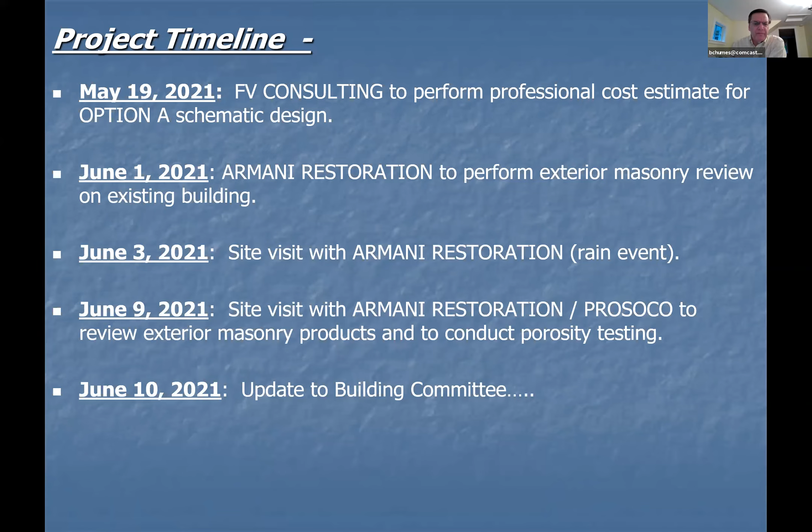Well, I want to update you as to what's happened since. On June 21st, the professional cost estimate was forwarded to the town of New Canaan. Also on June 21st, we forwarded the Armani Restoration and Prosoco Masonry results to the town. And on July 1st, I also provided a square footage comparison chart to New Canaan.

This is something that came out of your June 10th meeting: what's the square footage and how does it compare with the needs assessment? So I wanted to complete that, and I completed that on July 1st. Which brings us up to today. So those are really the three things I want to touch on today.

I'll do the masonry restoration first. Can I interrupt for one second? Can we just have everyone mute? There's some side interference. Thanks, Joe.

Armani Restoration is a contractor that specializes in masonry construction and masonry restoration. We contacted them to come down to take a look at the building, give us their professional opinion on the condition of masonry and limestone and anything that needs to be done on the exterior of the building. And they did that. What they found was the exterior of the building is in good condition.

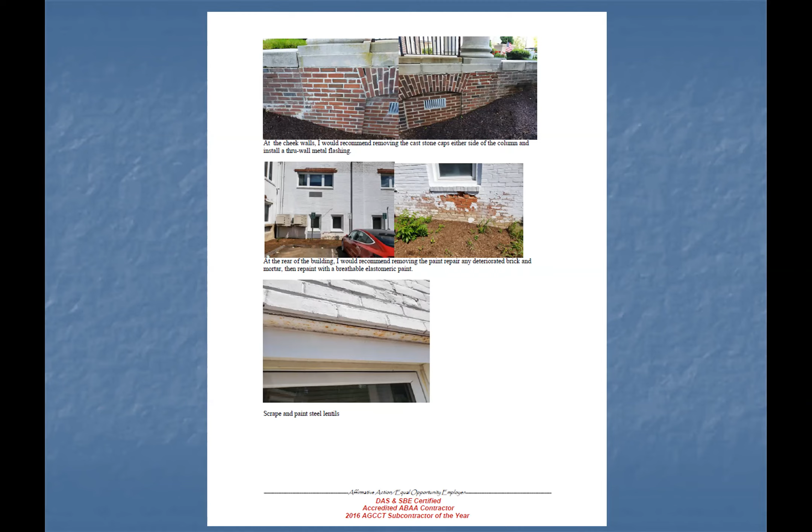How often would it have to be repainted? Those are going to have a lifespan of 10 plus years. So every 10 years it needs to be repainted, probably.

He also found some penetrations through the wall that weren't sealed - any penetration is just an opportunity for water to get into the wall. These are kind of minor looking at the entire exterior of the building. I saw these as pretty minor items we would take care of if we were going to renovate the building. It should be noted the painting issue is only on the back of the building - the ends, sides, and front, I believe, are pure brick and have never been painted.

Another interesting test they did is called the Rilem tube test. It tests porosity of the masonry using water. They put a device up against the masonry - this is a tube - they seal it to the masonry and fill it with 5 milliliters of water, representing wind-driven rain. Filling it all the way up to the 5 milliliter line represents about a 98 mile per hour wind event, with pressure applied to the masonry.

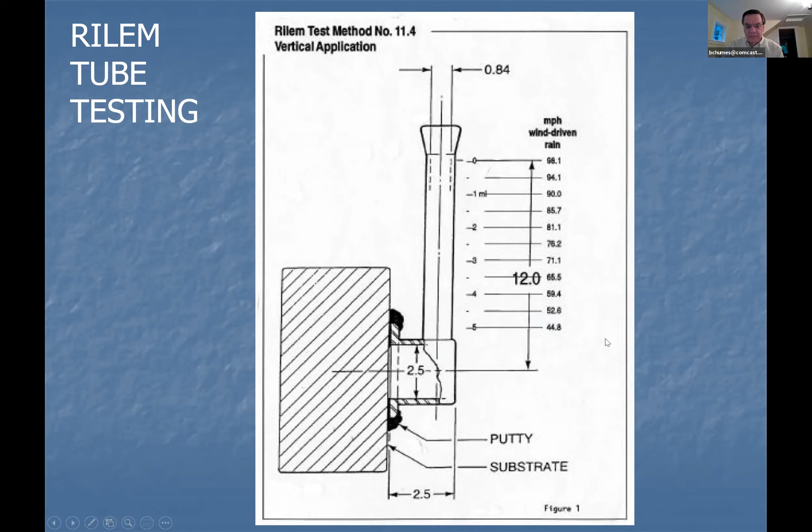So it's testing the water absorption of the brick under a wind-driven rain event - you can see the miles per hour of the rain event. Most rain falls vertically, but in some events rain comes sideways against the masonry, and that's when water has the opportunity to enter it. The tube was filled with 5 milliliters of water, and it failed in 10 seconds, meaning all 5 milliliters went into the masonry and was absorbed in 10 seconds.

A successful test would have no more than 1 milliliter of water absorbed in 20 minutes. So 1 milliliter in 20 minutes versus 5 milliliters in 10 seconds means the masonry used there is very porous. If you have a wind-driven rain event, that water is going to enter the masonry and be absorbed.

Now, this is something that's so not... Brian, what you're telling me is that the masonry here is as porous as the offensive line of the New York Jets? Is that what you're saying? Yeah, on a bad day.

And what you're also suggesting is that tomorrow morning, with 45 to 55 mile an hour heavy rains, we're going to experience the 10-second failure. Yeah, anything that goes against the building is going to get absorbed.

Hey Brian, is it the brick that's absorbing or is it the mortar? Actually, they tested both. The first one was the red clay brick. They tested it there, and the results failed in 10 seconds. And then the head joints and the mortar joints were tested, and they also failed in 10 seconds. So we have two results here - one's for mortar and one's for the brick. That's a good question, and they were both tested.

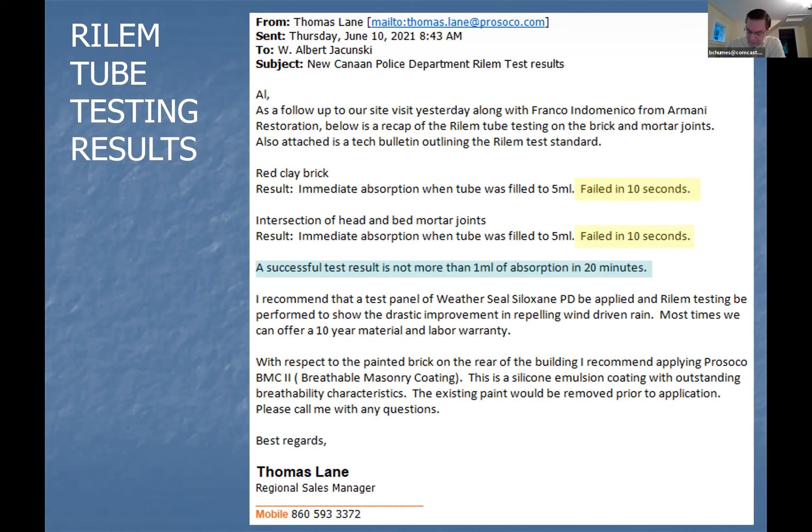And this is the product that would be applied. You could apply it to a test location and test it after it's been applied. But this is something that would also be under a 10 to 15 year reapply, like the back paint - you would want to reapply this and reduce the water absorption within your building.

Hey Brian, a couple questions. Is this product been around a long time? Is this kind of how, in general, people treat porous brick? The reason I ask is because we talked about the paint on the backside of the building - obviously the wrong paint was put up, but at the time they didn't think it was the wrong paint. Could this be one of these things that seems like a great idea, and then shoot, maybe it's not? I hear what you're talking about with the freeze-thaw cycle, and especially with changing climate, that might be more of a struggle for these brick buildings. But how long has it been around? Is it environmentally friendly? Could we find out this was a great idea, and then five years from now go, oh shoot, we've got to take this all off?

So I think Prosoco is a reputable company. They've been doing a lot of testing on these products. There have been other products in the past, but one of the things that's been a challenge for a lot of these companies is providing products that work and are also environmentally friendly. And that's changed the chemistry on some of these products.

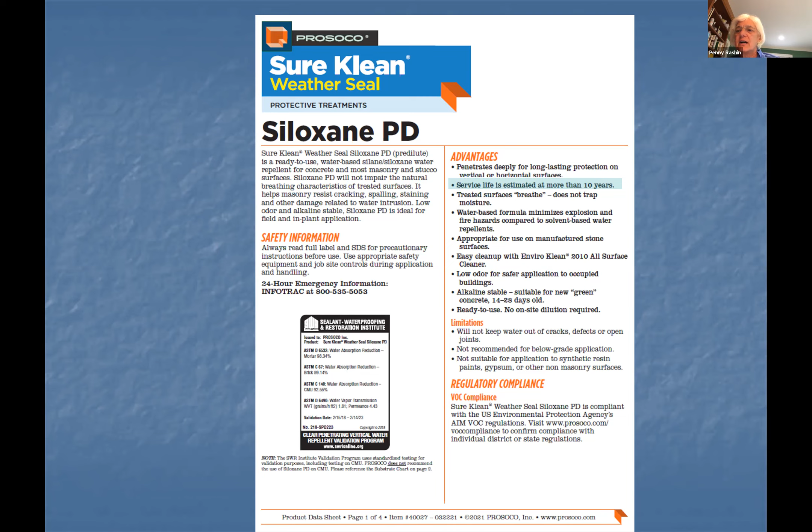Okay, so I think this is incredibly helpful, and I'm a little bit like Amy. It sounds to me like if it's the same brick that's been there for all those years, maybe we'd want to put this sealant on. But if we decide to go forward with the renovation, I think that would be another step where I'd want to know a little bit more about it before just agreeing to do it. This is a great report that our brick is in great shape. I'd be curious what the porosity was, and even if they tested it on the town hall before they did the town hall renovation.

Joe, I don't know if you know that or not—not to put you on the spot. No, we tested it. We added some through-wall flashing and did some other measures, and we repointed the town hall, which this one doesn't need.

And Joe, would it have failed as this one would with 10-second failures? It was not as porous as this, no. From a condition perspective, the town hall brick was in better condition than the police department building brick. I wouldn't say better condition—it was less porous.

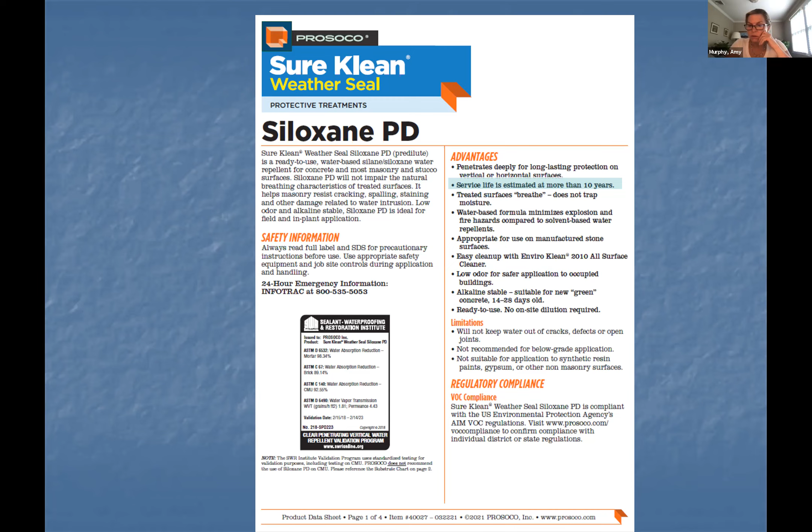It required a full masonry report, through-wall flashing—there was a lot of masonry work at the town hall. So is it basically a different brick? The actual brick is different. So I think it was well worth the visit that they took and the investigation.

Prosoco also gave a recommendation for the type of paint to put on the rear of the building, so that was also included in Frank's estimate. It was recommended that I just review quickly the scope of work that I sent to Frank to put within his cost estimate. You've seen these before—these are not new, but if there's anybody new on the call or on the committee, I just want to briefly run through what Frank has in his estimate.

For site work, he's included an independent cost to build the carport and an independent cost to construct the pistol range. He has an independent cost for putting the physical training addition onto the rear of the building. The site work cost he's carrying is for completely milling and repaving the fleet and staff areas to the rear, including the ambulance spaces, the drives down, the public parking in the front, adding some access control gates to the rear parking area, and also redoing the parking area between the South Avenue Cottage and the pistol range. We're not including anything for the apartment parking, so that's the delineation of where the site work starts and stops.

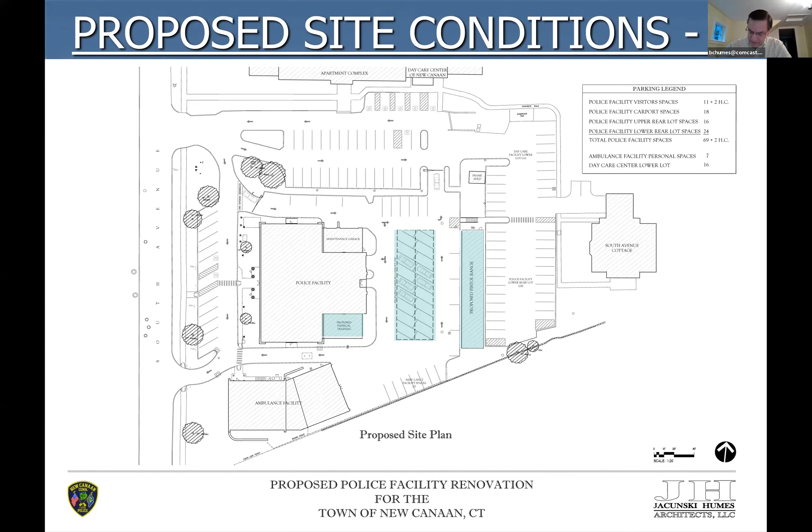This includes some relocations of the PD functions, but the relocation costs are not within the estimate. Those would be a soft cost to the town for any fit out that has to happen at Irwin Park, or anything that has to be moved over.

Frank's estimate deals with what the general contractor would be responsible for: staffing the project, general conditions of the project, and then completing the construction that's shown.

The cost estimate does not have within it any public accommodations. If the public would need to find an additional answering point for public safety during phase 2, we don't have that within the estimate, but something would have to be done to accommodate the public during that phase because the lobby would be off limits to public access.

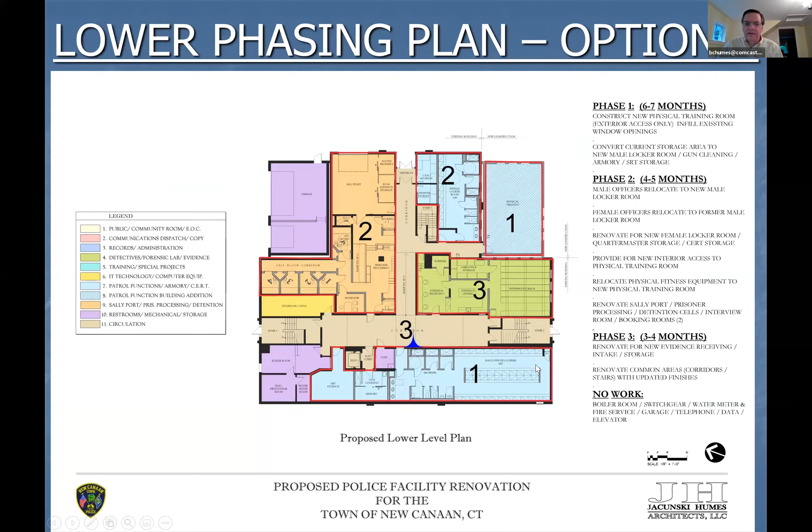You can compare the public space allocation in 2021 at 1143. Public means all of the yellow space that you see is public. So it's the emergency operations, public interview, restroom, lobby, vestibule, training classroom, even the permitting and interview rooms are all included in a public number. It's not an individual space, it's all of the areas in yellow regarded public. That's how I come up with 1143, but that's also consistent with my space needs assessment.

But you refer to that as actual square footage, when in fact is that not proposed square footage? I would agree with that, Stuart. It's actual from the actual schematic plan. Oh okay, but it's all being proposed right now. So actual and proposed, you could use them interchangeably, but it's what's on the drawing. Gotcha, actual from your proposed plan. Gotcha, okay.

So you can come down and see that there are slight variations in some. There are some deviations, administration is higher, Detective Bureau is higher, forensics lab is higher. You get slight deviations down the list.

How come the Sally Port's so much smaller? Because in the space needs assessment, we were anticipating a 2-bay Sally Port. And in the schematic design, we only were able to accommodate 1 bay. And Leon, does that work for you? I mean, that works?

Is Leon on? Sorry, what was your question? One bay Sally Port, well-designed, is that fine for you? No, obviously if it's a renovate as new, we're limited. So no, one is not ideal, two would be ideal. Well, what do you have now? You have one, right? Yeah, we have one. If, I mean, sure, it's like you always want the 3-bay garage, but it works for you? Okay, especially a redesigned one? It'll be better, right, than what we have now.

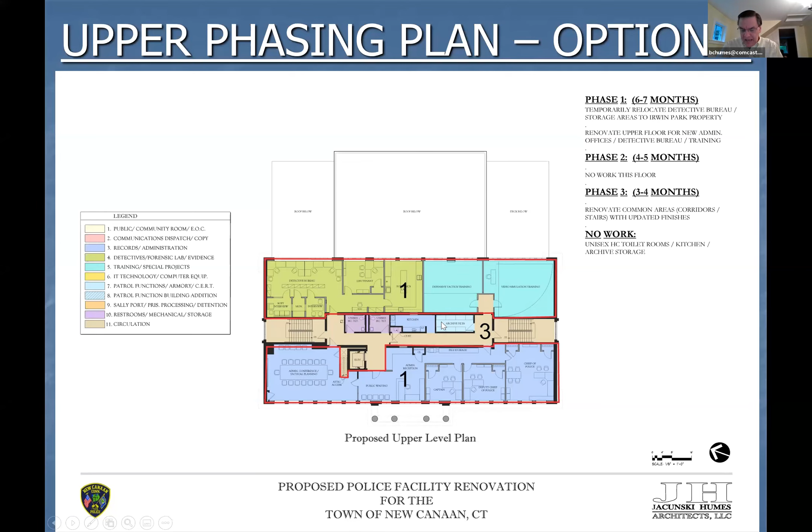The area of records is the area that's in blue with the 2 on it. That's their existing records, so that's where they have, and nothing was looking to change in that location as far as size. They do come over into this area for copy room, and so this is a common copy area that they also utilize. And where I was taking off the square footage for retention was on the 3rd floor. This archive files would be an area for retention of files beyond what they have within their record space. So they are retaining files within this space, but I also gave them an archive space.

To kind of add to that, in our tour of North Haven, they identified a serious deficiency with record storage. I think there's three areas of storage that we're kind of deficient right now in: property evidence, records, and vehicle storage. So those are kind of three focus areas, and I think we need to refocus on our needs related to those three areas and see what other considerations we can make. Because the reality is, as much paperwork as is digital, we still have a tremendous requirement to keep a lot of paper records, and that's not going to decline from what I understand. So that just needs to be an ongoing consideration. Right now we have a room where we're storing records, and we had some mold growth and had to remediate that and things like that. So that's just something we should certainly take a closer look at.

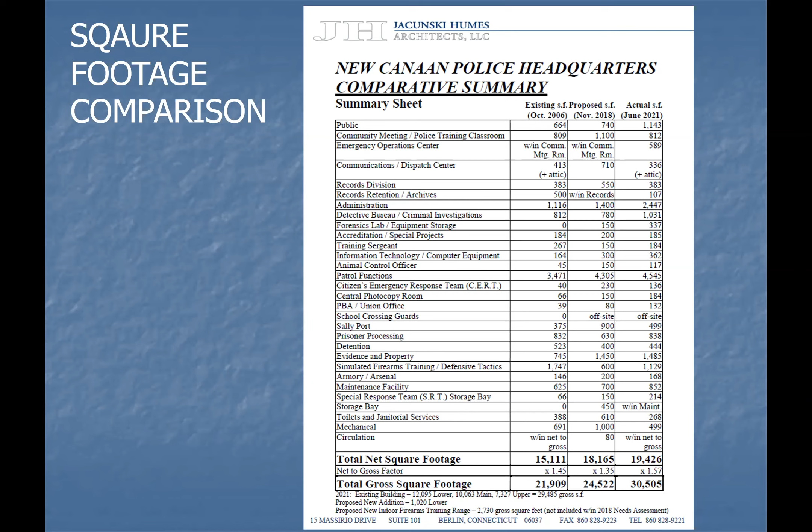It seems like if you had to grab more space, you could probably grab it from administration. I mean, if you're going up 1,000 square feet, and I'm sure the space would be nice, but it seems like if you have to steal some, I don't know, it could be a separate room or whatever, but it seems like there's more space there.

Because in this plan, which is kind of cool, we're giving the PD all three floors. Before we had talked about trying to carve out the 3rd floor for something else, which we know is incredibly problematic, and trying to have something co-locate with the police department. So I think it's a good idea to use the space for the PD, but it seems like there's space there we could redeploy if needed.

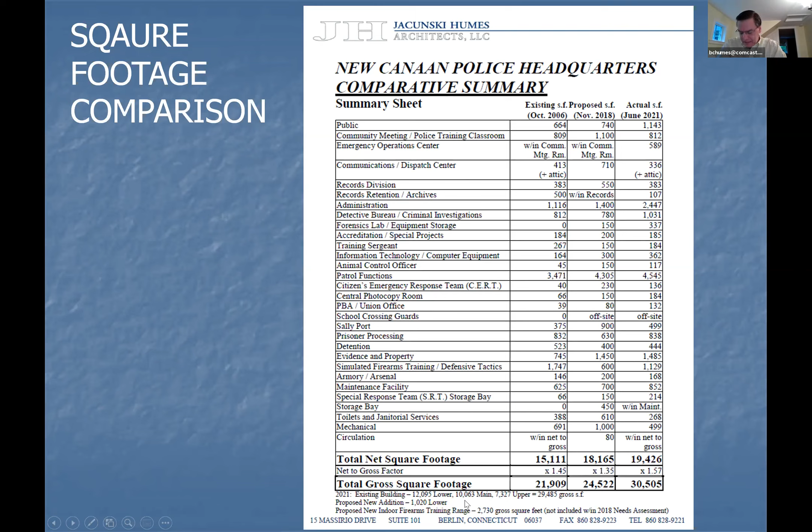So as I say, it's data. I think it's good data for you to have. I'm glad I put the chart together, and at the bottom of the sheet you can see square footages of each floor and how we came up with the gross, and then we added the physical training addition.

And that's just raw data. You're worried about the storm. Somebody else has to mute.

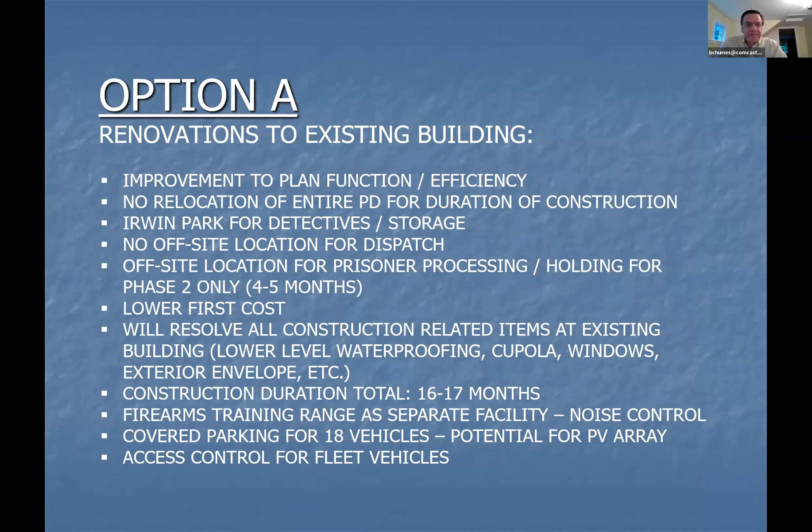So option A, this is the same slide you saw in June. It's what we sent to Frank for his cost estimate requirements, how we were going to make improvements to the plan. But what is actually this renovate as new? We've used the term back and forth, but what does it really mean?

The term is used in Connecticut for school construction. The Department of Administrative Services uses this term for school cost reimbursement programs. And what it means, taking their definition, because it's pretty common throughout the state, and it originates in the school renovation programs, is that the project results in a renovated facility taking on a useful life comparable to that of a new facility, and which will cost less than building a new facility.

So we're going to make it comparable to a new facility. I think if you looked at North Haven, that's what we did there. It's comparable to a new facility, but it costs less than a new facility. If you're going to go to school reimbursement, you have to prove that it costs less than building a new facility. This is done with cost estimates and professional cost estimators, showing the state that the renovate as new does bring cost savings versus just tearing it down and building it completely new.

The entire facility will be brought into 100% compliance with all applicable codes and accessibility requirements. That's a given. We need to make this building 100% code compliant to anything that's codes and standards, including what they have out there for police facilities called essential facilities. These have to be buildings that last through natural disasters, with higher wind load criteria and seismic criteria than any other facility in town. They have this essential facility requirement for hospitals, fire stations, police stations - any structure within your municipality that you'd want to have survive through a natural disaster. So that's a code requirement for this project, and we would have to bring it 100% into compliance.

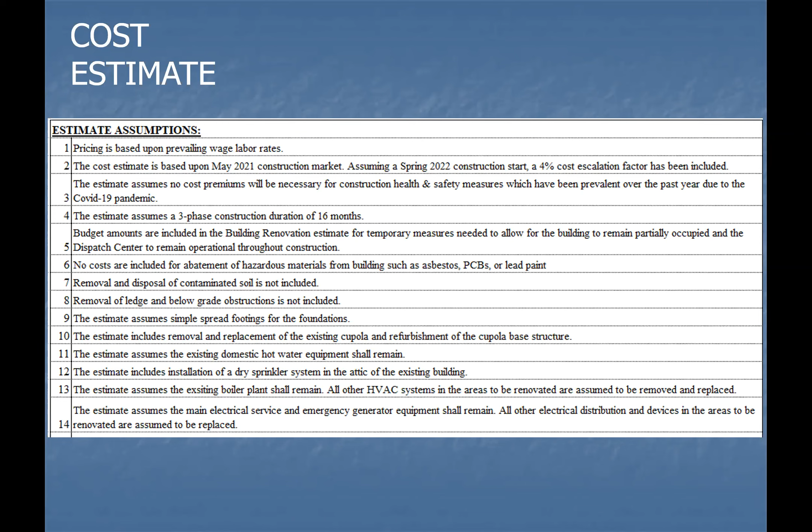Gotcha. Okay. Yeah, I think we just want to be sensitive and smart in maximizing useful life of stuff. But we also want to be smart and not have somebody come in 10 years or 5 years from now and have it be way more expensive to upgrade a system we could have dealt with initially. But those are fine tuning.

Yeah, and we can look at that further. It may make sense to replace the one older boiler with a condensing boiler. It's more efficient. So that's something that you guys can decide as a committee.

And we've assumed right now there's no sprinkler system in the attic, that I could see from any of the photographs that was forwarded to me from Brian. So in addition to redoing all the sprinkler systems throughout the building that do exist, we've assumed putting in a new dry sprinkler system in the attic of the existing building.

But I see a spelling error on my 13 - I had just mentioned the existing boiler plant.

I apologize for that. And lastly, the main electric service and the emergency generator equipment that exists, we've assumed will remain, but everything from the main electric room throughout the rest of the building will be replaced. And a complete new fire alarm system would be assumed for the entire building as well.

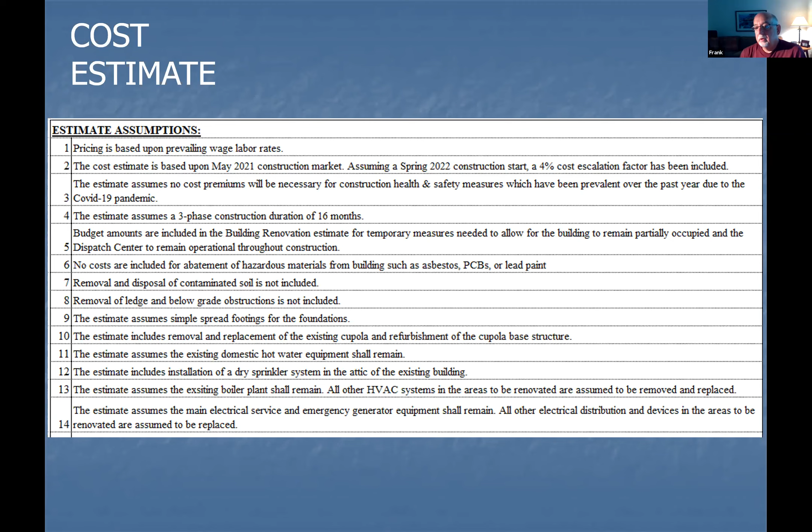For instance, the elevator. I've assumed no new work on the elevator. That would mean that the electrical provisions for the elevator system would remain in place, and would not be replaced.

When was the elevator installed? How old is the elevator? I don't know, that was a 2008 renovation. And what's the useful life of an elevator typically? A long time, life of the building. Yeah, okay.

Well, we wouldn't say the life of a building, but I'd say, Brian, I would use something like 30 years or so, 30 to 40 years. I see buildings with elevator refurbishments happening after a 30 or 40-year life cycle.

When we put the elevator cab in, it does have all the accessibility requirements that come with elevators today. So the control panel does have newer technology and accessibility requirements. In 2008, the shaft was already there - we added the equipment to an existing shaft.

So we don't, and this is again fine tuning, have any consideration of solar or anything like this. And the roof's okay, right? The roof's fine. Have we looked into that? Because I know we're doing a lot of solar across many of the town buildings.

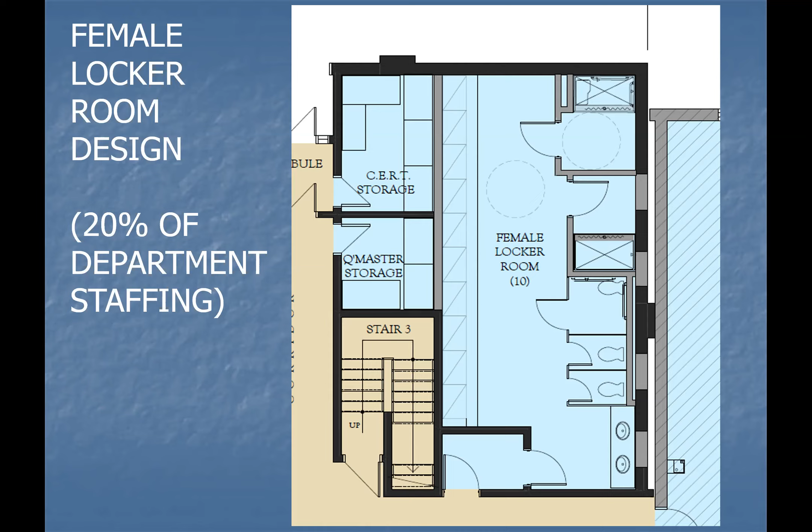Definitely it'll be more than a year. Okay. But we'll give you a better answer on that, Chief, but thank you for doing that. Of course.

Bill, just a couple quick slides. I don't want to belabor this, but it came up at the last meeting that we had in June. And I just wanted to respond that there was a discussion about how many female lockers should be in the locker room. And we talked about how we based it off of 20% department staffing levels.

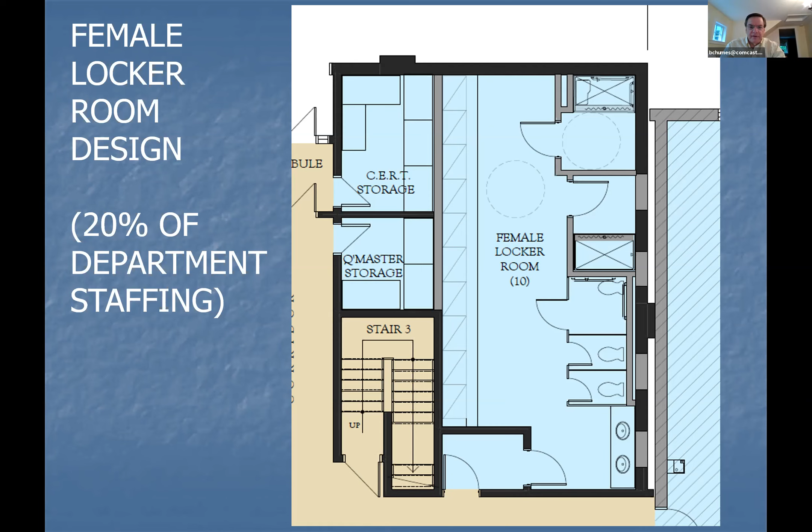I just wanted to let you know that the plan isn't locked in stone. I mean, there are things during design that we can continue to address. Or in porcelain, as the case may be. So I just give this back to the committee as information.

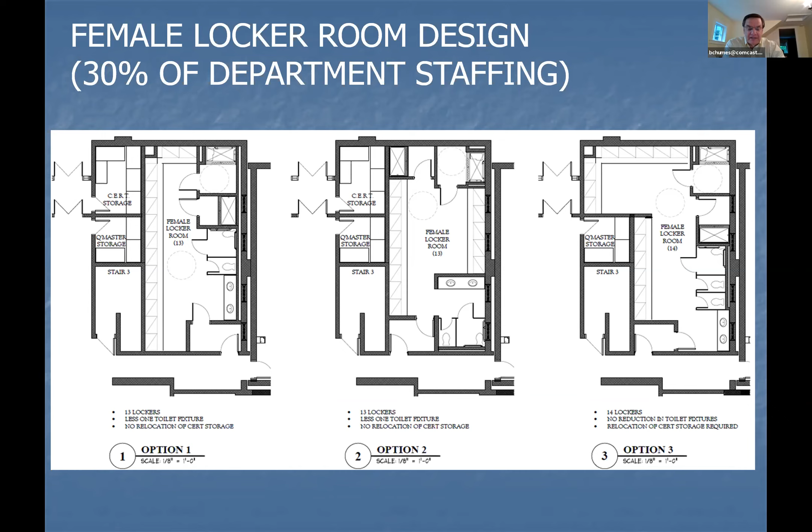But you said next steps. As far as our scope, the next steps was, I think we've completed what we've been asked to do. We were going to put everything into a final report, but now we'll just add the option B results that you're looking for also. So that's it for me here. Thank you. Any final questions for Frank or Brian? Oh, very good. Thanks. Thank you so much, guys.

Any other elements we want to talk about? The only thing that jumped out at me, I'll just reiterate on the cost, the landscaping. I gotta believe that if we do move forward with a refurbishment, our neighbors would request that it be the right thing to do to have some more serious landscaping as a potential shield and things like that. That would be incremental costs as well, not included initially with the initial estimates, but that's something to keep in the back of your mind.

Are there any other comments we want to make? Let me just ask you guys, I'm happy to update the estimate to reflect a more ample budget for landscaping, as well as to factor in the premium cost for acoustical panels to mitigate the pistol range equipment, and reissue that to Brian so he can put that in his final report with those costs in it. I'd certainly be in favor of that, Frank. Yeah, that'd be helpful, thank you.